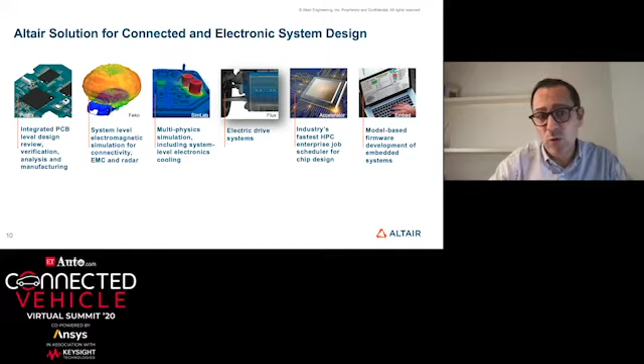Now, with respect to our solution for connected and electronic system design: at the board level, we have technology basically for PCB design review, analysis, verification, and manufacturing. Then when we go to system level, we have our electromagnetic solutions for connectivity, EMC, and radar.

For multiphysics simulation, we cover, among others, electronics, cooling, electric drive systems. When we talk about chip design, we have the fastest HPC job scheduler. And last but not least, we have a visual environment for firmware development. Today, we are going to talk mainly about our connectivity solutions with our electromagnetic simulation capabilities.

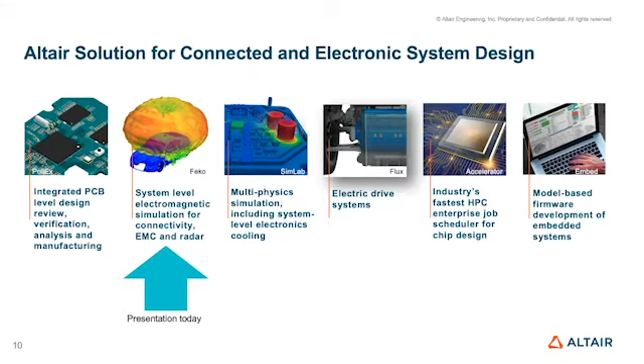When we talk about vehicle connectivity technologies, we are basically talking about all the technologies available from cellular, 3G, 4G, 5G, Wi-Fi, Bluetooth, satellite navigation and communications. This, for example, includes GPS and Sirius XM, vehicle to X, remote keyless entry systems, radio broadcasting, and others.

In particular, with respect to V2X, we basically have the DSRC, which is not relying on cellular infrastructure and being important for road safety and traffic efficiency. And also we talk about CV2X, which relies on cellular infrastructure and where we see an evolution towards 5G, where the use cases related to safety are important and also in connection with autonomous driving.

And this is a video we would like to show you where we explain our offering and solutions for connected vehicles.

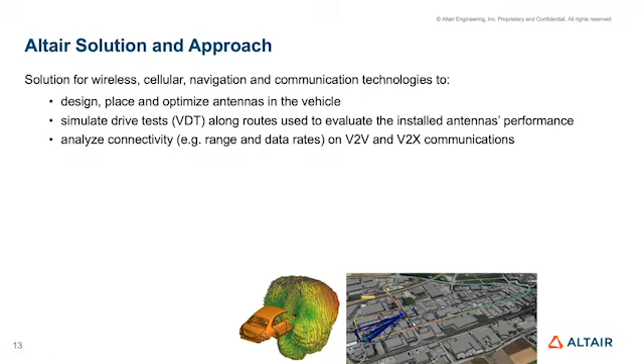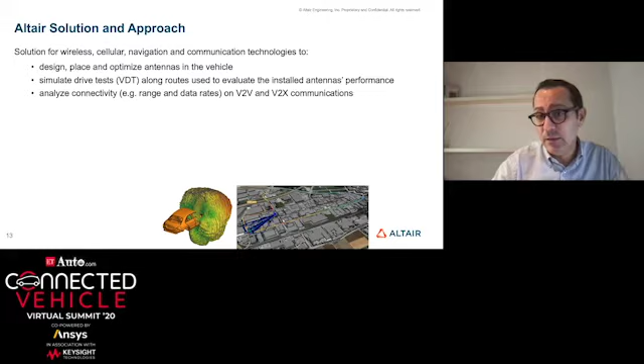Then we talk about simulating the drive tests that are used to validate installed antenna performance, and also the drive testing for connectivity, including range, data rates, which are important for vehicle-to-vehicle and vehicle-to-X communications.

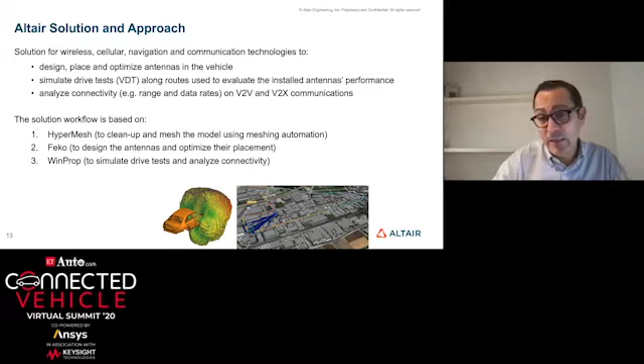In terms of the workflow, here basically we start with Hypermesh to clean up and mesh the model, including automation. Then in FEKO is where basically we design the antennas and optimize their placement. And after, we have WinProp, where we're using the antenna simulated in FEKO and simulating the real environment. We are analyzing the drive test and the connectivity aspects.

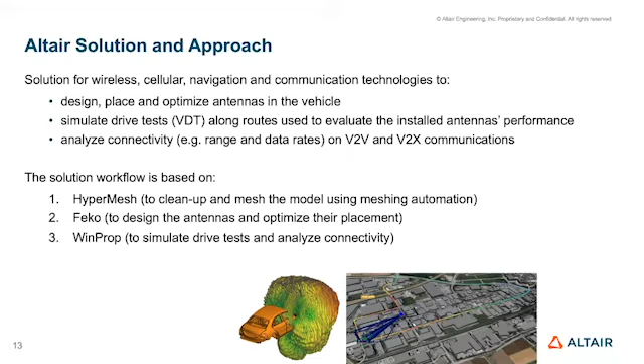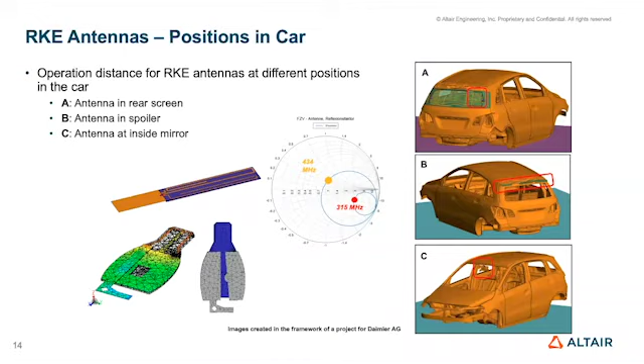This is an example from Daimler in Germany in this car related to remote keyless entry antennas. On the left, you can see the different antennas in the key fob, but now I would like to ask you to focus on the images on the right, because there you can see how Daimler is analyzing possible different positions for the antennas in the rear screen, spoiler, and inside mirror.

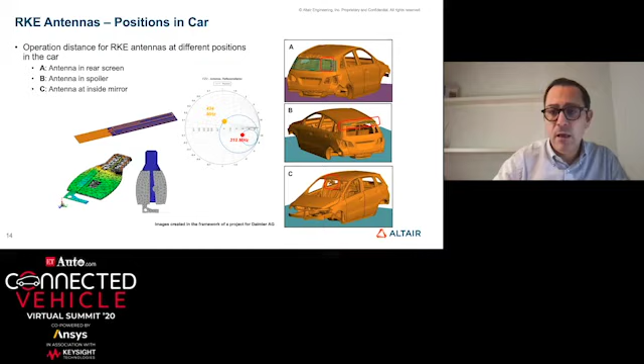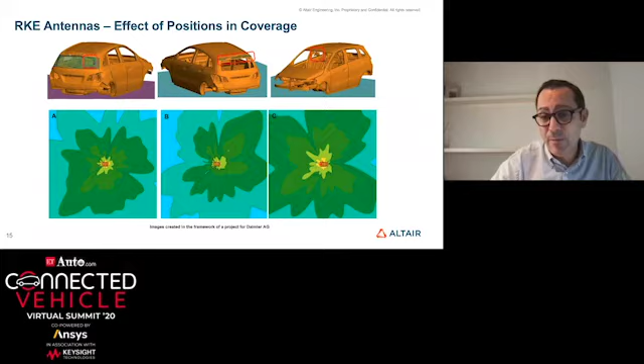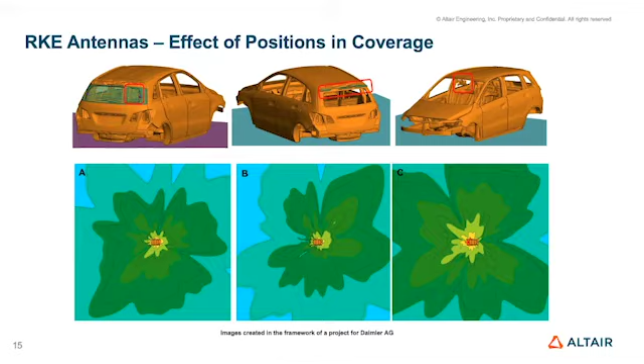By doing simulation, they are analyzing the near field patterns for the different positions, and comparing these patterns, especially looking at the shape and the nulls, because depending on the direction, it may happen that communication between the key fob and the car is not possible. This may mean the user may not be able to lock or unlock the car from some specific direction, something they obviously want to avoid.

If we move to virtual drive testing, this is another case, from an automotive supplier, Kathrein, now Continental, where they are doing multiple drive tests to validate the installed antenna performance. This is an example for an LTE antenna using MIMO, which is why in the photo you can see two antennas. At the bottom, you can see an image of the area where the blue circle is the base station.

In red, you have the test track, while what they are doing is driving the car along the route. While driving, they are measuring the received signal by the antenna in the car. This is something they are basically doing measurements for, but this type of measurement is costly and very time consuming, and they are now moving to simulating all these drive tests.

This is a comparison of receive power against distance, where they compared their measurements with the simulated results using our technology, and you can see there is a nice agreement between them.

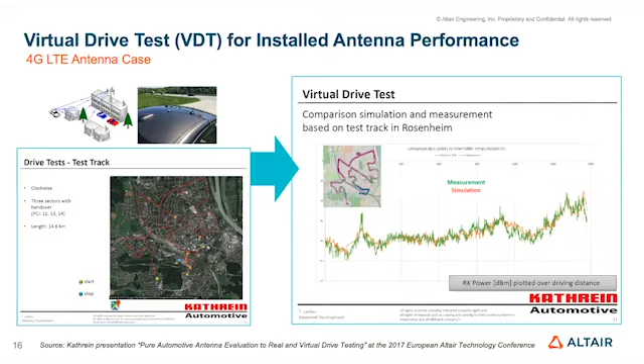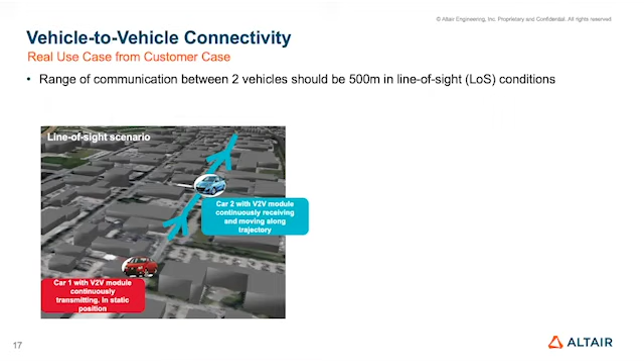Now, if we talk about vehicle to vehicle, this is also from another automotive supplier in Europe, where they wanted to analyze two scenarios. The first is to simulate and ensure the range of communication between two vehicles is bigger than 500 meters, where in this image the red car is static and the blue car is moving. The second scenario is a case where there is no line of sight between the two cars, and you will see in a moment why this is also important.

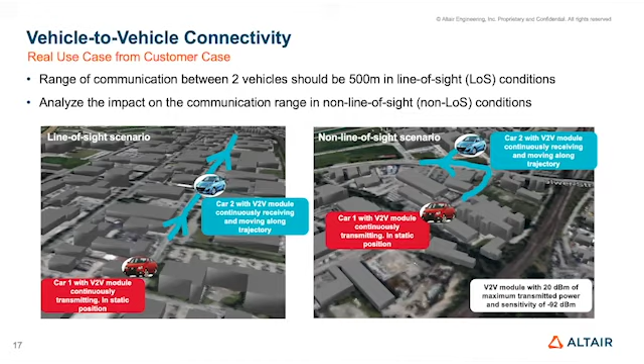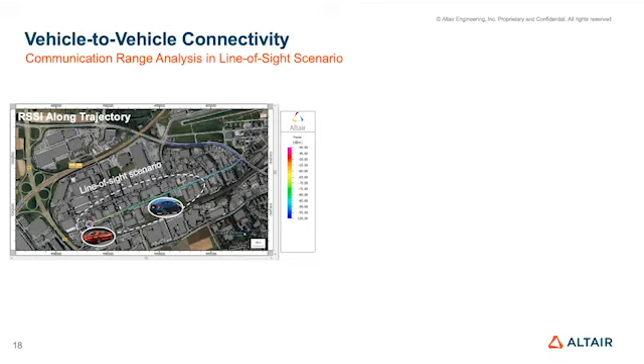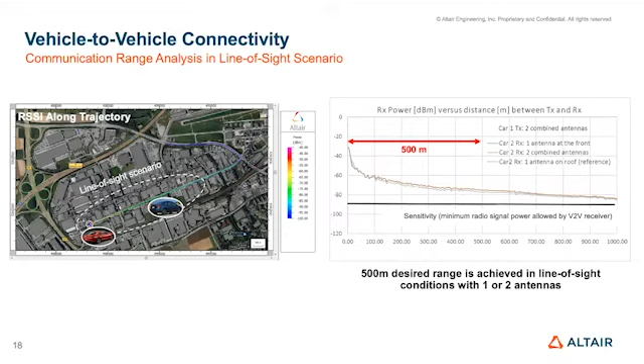If we look at the results for the line of sight scenario, this image shows received power by the blue car while it is moving along the track. In this graph, the black line represents the sensitivity of the receiver. There is no issue in achieving the desired range, even when using different types of antennas in the vehicle.

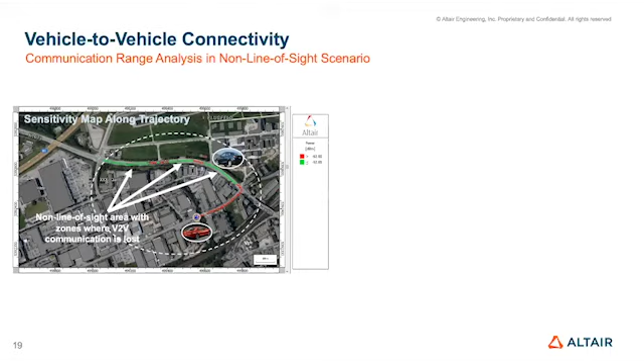If we now look at the other scenario, the non-line of sight one, the situation is a bit different because, as you can see in the image, the two cars are not seeing each other all the time. There are some areas shown in red where there is no communication between the vehicles, something you can more easily see when looking at the areas below the sensitivity level. In these areas, there is no communication.

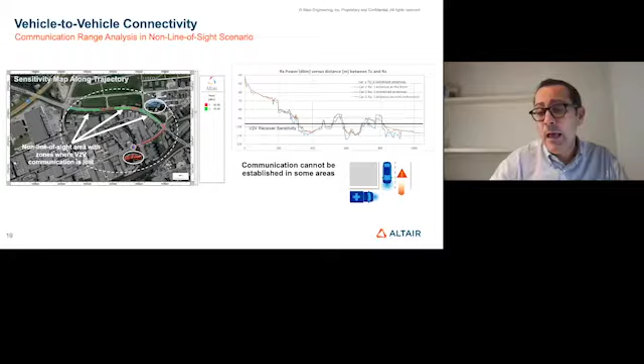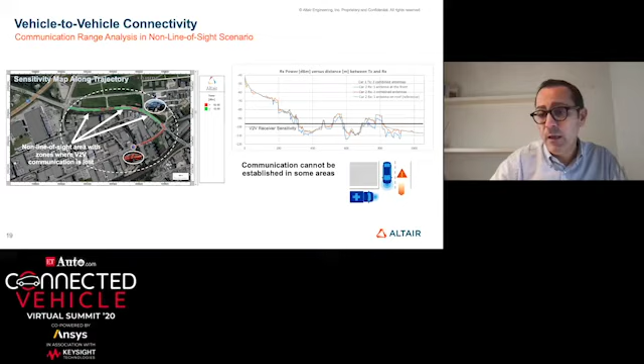This is something which needs to be carefully analyzed because, for example, in one of the use cases I was showing before, you can have two cars approaching an intersection and you want to be able to have communication between the two of them before approaching the intersection.

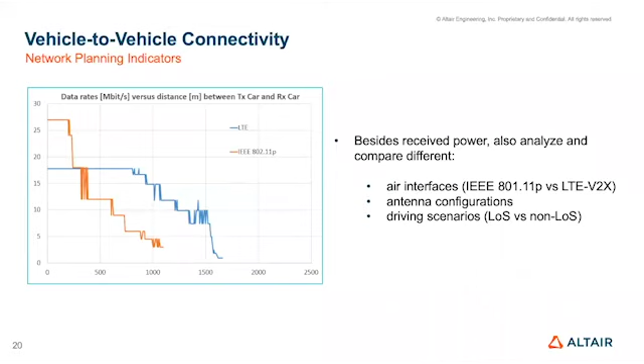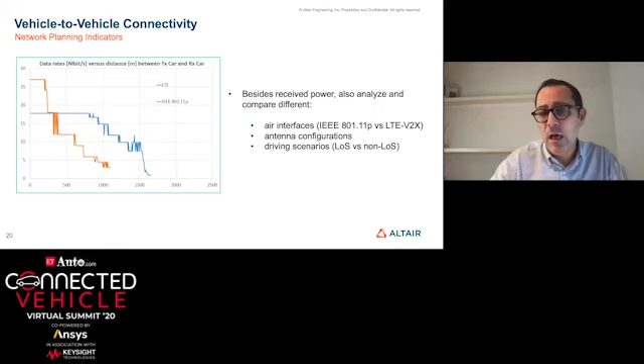It's not only about received signal strength, but also important to analyze other parameters. This is, for example, a comparison of the data rate against distance when comparing DSRC against LTE technology, to analyze and compare the benefits of using different technologies for vehicle-to-vehicle communications.

To finalize the presentation, we'd like to talk about V2X and the relation to ADAS. V2X has become an important part of ADAS systems to communicate between cars, as I have shown today. We are also touching on, and have solutions for, radars, ultrasonic, and LiDAR, where for LiDAR our customers can leverage the TracePro application, a third-party application available with our licensing system through the Altair Partner Alliance.

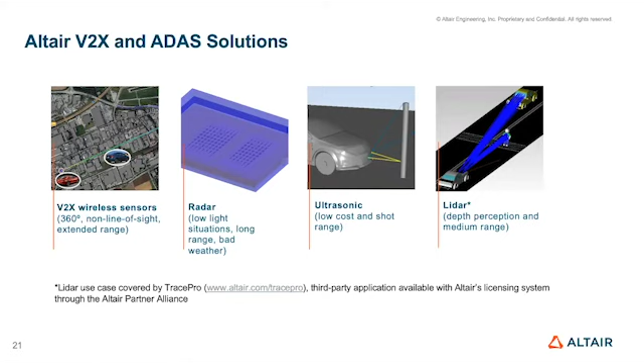With respect to radar, we talk about three levels of integration for the sensors. The first is what we call the integration scenario analysis and scoring, where, for example, in the case of integrating an antenna in the bumper, we are looking at the properties and characteristics of the bumper in terms of layers and paintings.

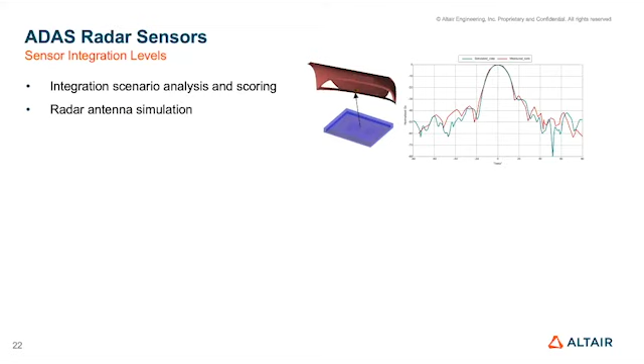The second level of integration relates to the simulation of the antenna and its integration in the bumper, where on this graph on the right we compare the radiation patterns of the antenna in the bumper, showing a comparison between simulations and measurements.

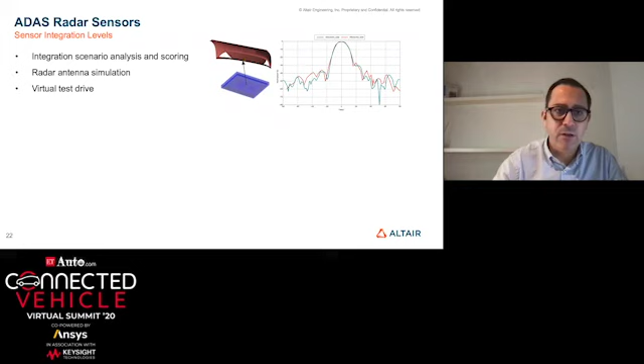The third level of integration relates to virtual test drives, a case where we have many customers working on this. You have a car going through a bridge, and the car is slowing down because it's detecting some false object, which is why we talk about a false detection. The reason for this is that on the right, you can see that the antenna pattern has a side lobe which is higher than expected.

This is because in the integration phase, the fact that there is a badge in front of the antenna was not properly addressed. This badge is responsible for the increase in the level of the side lobe, which is then responsible for this false detection.